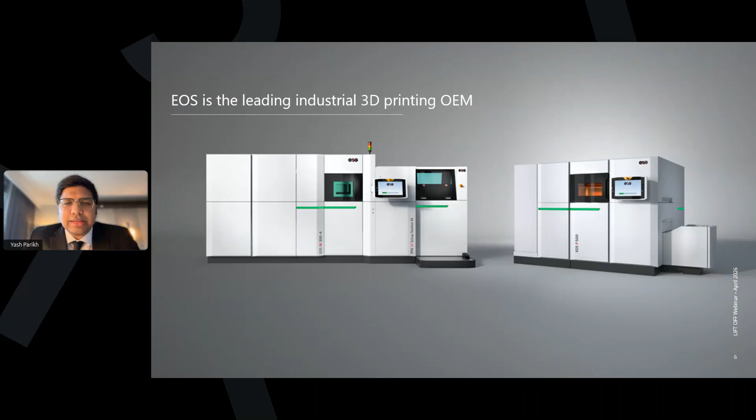From 4 employees in 1989 to 1,500 employees strong, we have presence in Asia, in Australia, in Europe, and over 5,000 systems have been sold globally, out of which around 2,500 reside in North America. So every other research paper talks about research conducted on EOS systems, and it's a moment of pride for us, and at the same time we take a lot of responsibility to be upfront on the research side of things as well. So from the revenue that we generate, 10% goes back to R&D.

And just last point here is global business is split 55-45 between metals and polymer. And if you ask me about North America, it's more like 70-30, with 70% on metals. Go to the next slide, please.

So that's enough of EOS. Let's talk about qualification. If you go to the next slide, I was pondering upon this question. I'm right now actually in DC, and I'm part of the AM coalition, and we are meeting all the senators. And I was just pondering upon this question: what are the key issues that are preventing a wider adoption of additive in general?

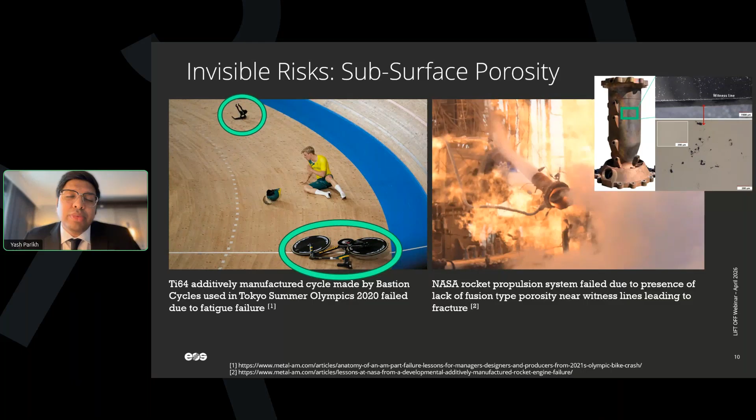And on the right hand side, you see a thermal mismatch that was studied by NASA. They looked at the interface temperature difference, interlayer temperature difference, and they paused the build for a couple of minutes. They wanted to see what happens if you resume the build. And I believe I have a video for this. It should be able to play. Go to the next one and I'll talk more about it. Take a look at this video.

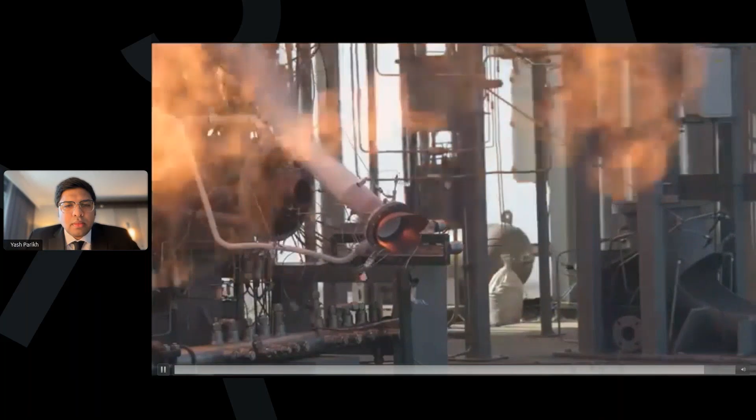All right, so that happened. I don't know if the audience was able to hear the sound of it. If not, that's what you got. Next slide, please.

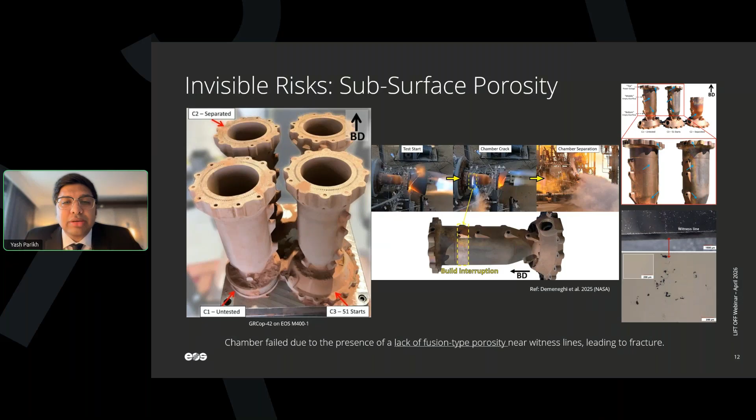This was printed on our EOS M400-1. Four cylinders were printed in the configuration you see on the left-hand side of the screen, in GRCop-42. As I was telling you, they wanted to see the thermal mismatch. In the laser powder bed fusion process, the solidification rate is 10^4 to 10^6 kelvin per second. They stopped the process in between and then restarted it. What came out is the build interruption and the witness line formation on the extreme right. Right below, you see a witness line which has lack of fusion porosity. That was the key reason for the failed part during testing, and you can see on the middle screen how it progressed. So go to the next one, please.

If you're using multi lasers, then one laser's soot is in the way of the others, and so many other things going on. So there is a joke in the community: your chances of a defect free part are less than your chances of winning a royal flush. So yeah, that's a reality. If you go to the next slide, please.

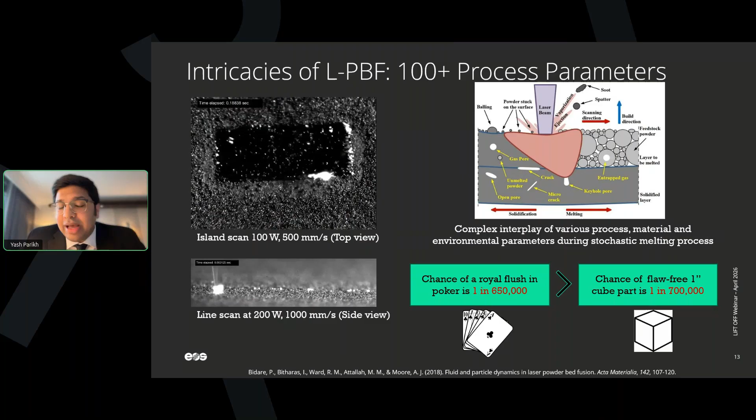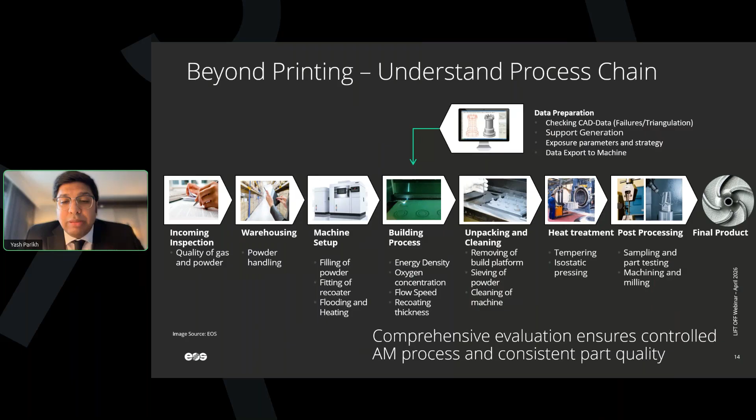Most of the time, the post-processing steps are the most important factor to the final performance of the part, because they are derived from the welding and casting literature, and they do not do justice to the laser powder bed fusion made part. So there is that. The fatigue behavior changes significantly if you have a different surface finish done on those parts off of the build plate. Go to the next one, please.

it gets confusing. What you're looking at is once the machine is made, and let's take an example of EOS, machine assembled in Germany, they run a test called factory acceptance test. It gets all the line checks done on it, and it's like thumbs up, it's good, it has passed its initial verification. It gets shipped to a customer in the United States. They run the same job which they have done at FAT, factory acceptance, and now it's called site acceptance. And then they compare, contrast the results, and now it is called installation qualification ready.

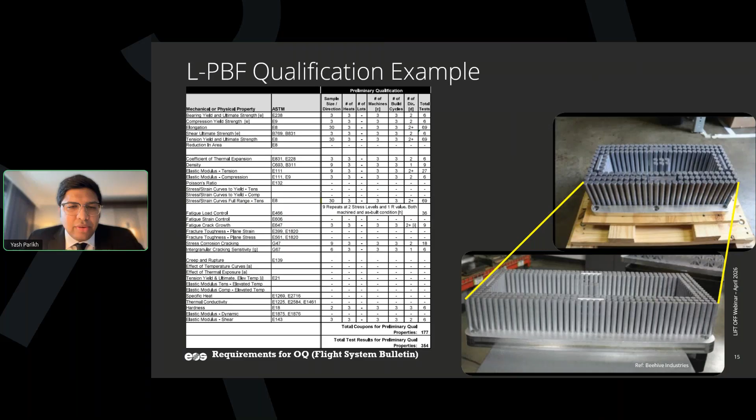If you go to the next slide, it tells you some of the numbers that are available in the literature. This image and the numbers are taken from the reference below. It's a paper published, and it tells you that the coupon count you saw on the previous slide is anywhere around that ballpark. Of course, it varies machine to machine, envelope to envelope, criticality of the part, material utilization. What are you trying to qualify?

Because it's a complicated term. The door hinge's qualification requirement, and subsequent issues when it fails, are different than something around nuclear. So these numbers, you have to just take it in a way that, okay, this exists in a variety of applications, and they don't carry over from application to application. But this is just to give you a ballpark.

And those in the audience listening to this need to know what qualification means in simple words. So when I talk about qualification, it means demonstrating the process is reliable and repeatable no matter how many times you print that part, where you print that part, who prints it. That is about qualification. And certification is about gathering all the data that you just did for qualification and giving this to a certifying body to make sure that they authorize your application to make that part. Could be an implant, could be a sporting good, anything like that. So that is all about qualification.

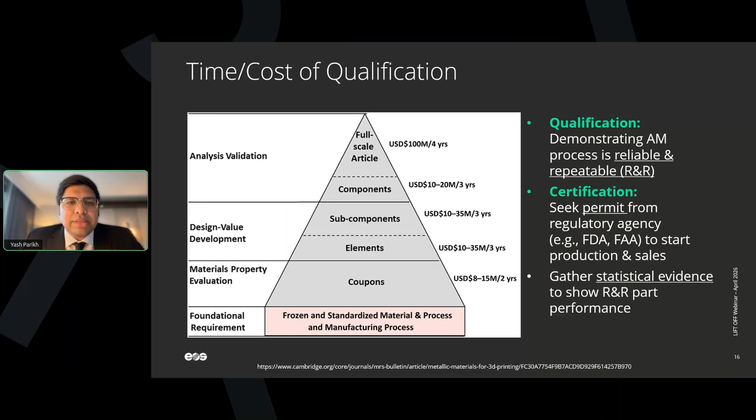So go to the next slide, and as promised, this is my last slide on qualification. The topic that I'm touching upon is AI, in-situ process monitoring, and closed loop control, which is the next generation of the approach for expediting the qualification burden. You see on the left-hand side, there are two different approaches. We talked about the disadvantage of doing this test coupon type of thing, and it's just costly, time consuming, doesn't really reveal the true nature of qualification, but you do it because that's what people have been doing. On the equivalence qualification side of things, A is equal to B, B is equal to C, and then you deem A is equal to C. But that's a lot of engineering judgment there.

What industry has been utilizing in the last, I would say, 5 to 10 years is reliance on ICME approaches, digital twins, a lot of emphasis on previous data. Take a look at EOS, for example. We have 35 years of machine-making experience, right? So we have all the factory acceptance test data on all our printers. Maybe that's a good starting point to take those data and understand where printers are, how their distribution of certain mechanical properties within the envelope exists. And then the newness is the in-situ inspection. People have tried those, but how do we do it for qualification?

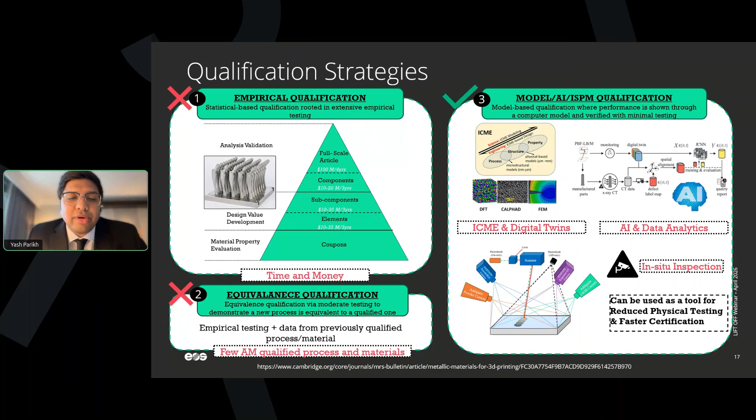So go to the next one. So next 40 minutes, there are about 60 slides on this. Let's see how many we can cover. Go to the next one.

Okay, so the concept lies on signature. If I ask you to draw your signature, like a physical signature, and ask somebody sitting next to you to do that, you can immediately say that that's not my signature because it doesn't have the uniqueness that only you can bring to your signature. So that concept has been executed in the next few slides.

The execution starts with running nominal jobs. The nominal jobs could be a configuration that you keep constant, because remember, qualification is all about making things fixed and then understanding the variation afterwards. So you define a nominal job, and I'll show you some examples of it, and then you run it a couple of times. How many times? I would say 3 to 5 times would be a good ideal starting point.

What you would see out of this is all the differences that you can get from running the same job so many times on the same machine, on the same layer thickness, on the same material. Of course, the differences are because you are now sieving the powder. You have a 67-degree scan rotation. You are utilizing different placements. All of that matters. And then you identify a signature that you think is an appropriate representative of this part or a build job.

So you put these modalities inside the laser powder bed fusion system. It could be 290, 400, 300s, and we tried it on our other OEM system as well. The concept is straightforward. You pick these modalities based on their defect detection wavelength. The radiation type differs, their wavelength differs, and hence the defect detection capabilities differ. I'll show you in a second how the same layout has been pictured via different modalities, and I'll go a little deeper into how each of these is helping us. The next one, please.

So EOS currently offers 4 different modalities. 3 are listed here. The other one is closed loop control. EOSTATE PowderBed is a powder bed camera of 2 megapixels. It's an off-axis mounted camera, and it takes a simple picture of the powder bed after exposing and after the recoating is done. It gives you the information if the recoating is being done properly, if there is part warpage, if there is recoater striking, if there are streaks on the powder bed; all of that you can detect with the optical camera.

On the melt pool side, you have an on-axis mounted photodiode, which is probing at the melt pool level and looking at the melt pool stability from all the photons that get emitted and captured on the photodiode.

On the exposure OT side, you have an off-axis mounted 12 megapixel sCMOS camera constantly capturing all the information from the build envelope, and it gets you the layer-wise process stability. So you're probing now from the solidification standpoint, from the standpoint of the melt pool. And of course, for the purpose of qualification, you need all of this information, which can be spit out as part of quality reports. Go to the next one.

Here's the fun. Yeah, you keep pressing next. You see, this is the laser. This is the on-axis EOSTATE MeltPool. The green one is the exposure OT on the off-axis side. And again, the off-axis powder bed is listed here. The off-axis ones are calibrated, and also you run a correction job so that their position bias is no longer an impact to the results that you are using.

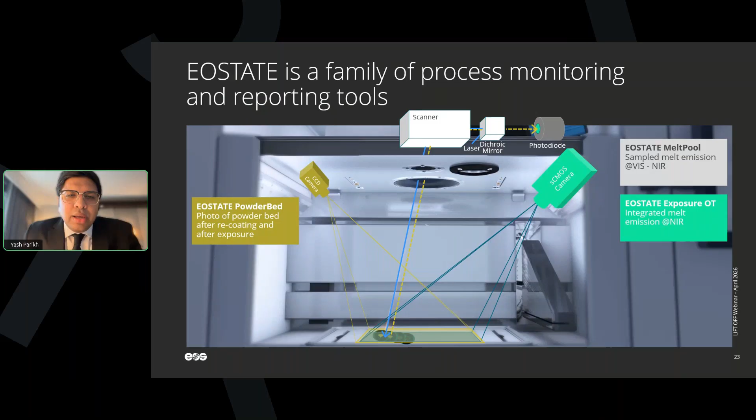What it does is the researchers have done this kind of work 10 years ago, and they gave us like, okay, my powder bed gives me these sort of streaks, swelling, short feed information, incomplete melting that you see on the first half of the image. The bottom half tells you the thermal imaging, which would be telling you the interlayer temperature right after the recoating is completed. All the exposing is done and recoating is done.

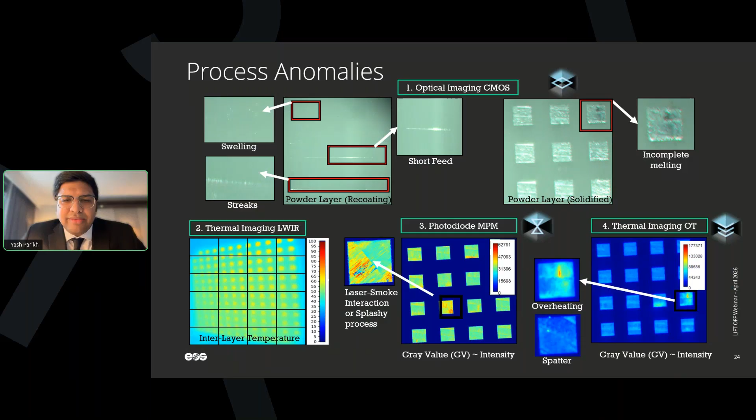Now you take the temperature of the build, and then you do the photodiode for melt pool monitoring and thermal imaging for OT for its stability. If you go to the next one, you will see here that I'm going to repeatedly use terminology such as gray value, and I would say mean gray value. So I want to take a moment to explain to the audience what I mean by gray value.

So understand, when the laser hits the powder bed, which you see on the top side from the scanner, a lot of photons get emitted. Of course, these photons get captured by an sCMOS camera that you saw. Depending on the 8-bit or 16-bit camera signal, the photons that are transmitted to electrical signal get to a certain value of the bar. If there is a 0 value, it means there are no photons emitted and there's no light. If it's absolutely dark, it's no light, it's 0 value. If it's maximum value, it means the maximum emission is happening.

And you can consider it loosely to say that there's a cold part, there's a hot part in one way or the other. So you see an example for a 16-bit gray value. The scale bar is 0 to 65,500 something. And when you are exposing it, it gives you the gray value from that scale. Okay. If it's a mean, it means the mean of all the pixels of that OT mask divided by number of pixels. And that's the mean of a layer. You can have a mean of a part, so on and so forth. And these parts are like 2000 layers or 50 layers or 700 layers, depending on how tall these parts are. Okay. Go to the next one, please.

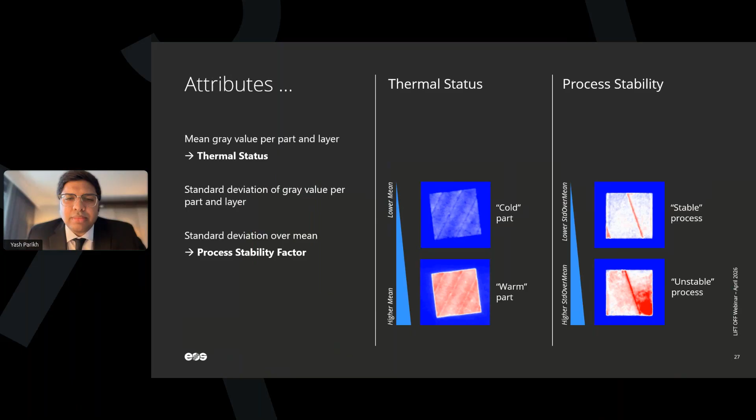And before we jump into the actual execution, this is exactly the same story. If it's a lot of photon emission, it's a warm part. If it's not a lot happening, it's a cold process. Similarly, a stable or unstable process can be identified by the gray value variation and the higher standard deviation. Okay, go to the next one. The one thing I want to bring to your notice is this. The OT works with a masking technology, meaning it does mask on your CAD, on your scan area.

And we have come across a few instances later on, but just be mindful that in order to have a good OT, you need to run a calibration job, and you also need to understand if the masking has been done correctly. And this is a software correction. So you just have to run one of the calibration builds, and you should be able to do this correctly. Okay, go to the next one.

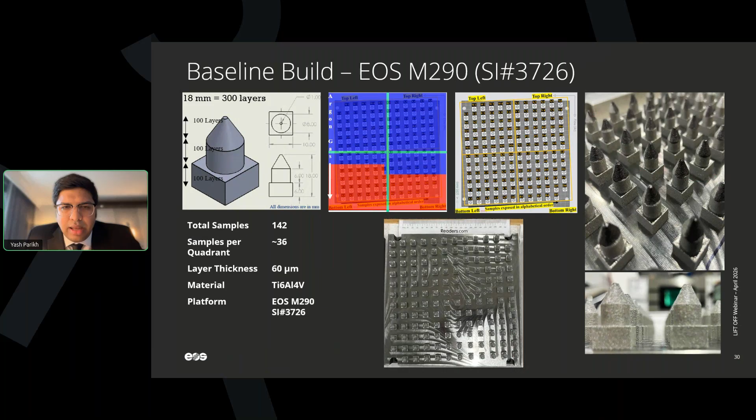So we chose this, we made an 8-hour job, we made it 300 layers, 100 layers each for each cross section, and we did 60 micron. So you can understand that is how it is. It is 18 or so. Every 6 millimeter, the cross section changes, right? We laid out 142 of these on our 290, and you can see up close the scanning happened in the unidirectional direction that you see on the red path of the laser. And go to the next one.

This is where the next 30-odd slides of fun begin. OT is telling me this: my intensity across the 142 samples somehow is not even, meaning some of the pockets on my build plate are emitting more photons than the others, though I have a scanning which starts at lower left and ends at top right. On the left hand side you see the 3 segregations of 100 layers each for each sample combined. You see there is a pattern where the bottom right region seems to continuously have a higher mean gray value than the other areas.

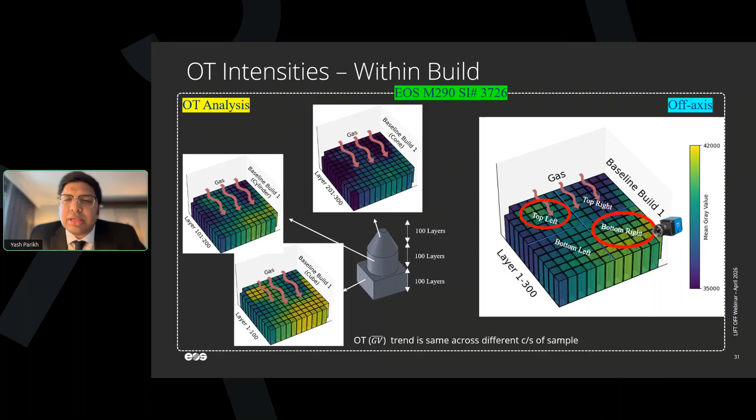Especially take a look at the top left region as well, which emits a very high gray value compared to the top right. Of course, this is an M290 machine. There is a gas flow which comes from back to front, and recoating is happening right to left, right? So when you combine all 300 layers, this is what I see. And I thought this is an anomaly, or this is just because I ran this baseline build one time. Go to the next one.

I did this 3 times. The results remain the same. You see baseline build 1, baseline build 2, baseline build 3. All 300 layers show a similar behavior. This tells me that no matter how many times I'm going to run a job, my specimens on the bottom right are always going to be hotter, or always emitting more OT value than the others. So why, is the question then? It's an off-axis mounted camera. So the bottom right illumination was because of the bias of the camera placement.

When you open the 290 door and look at the build chamber, you'll see the position of this is at the top right corner. There is that, and then there is a gas flow which is hindering on the top left side of it. And you can see the CFD analysis. NIST has carried out a very detailed study of a similar observation, and that has to do with the grid nozzle that has been utilized, which has some pocket over there. So, go to the next one.

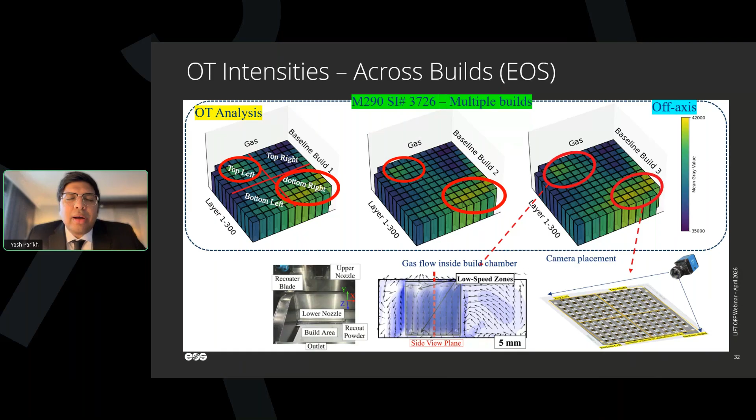Out of 142 samples, we labeled them from A1 all the way to X6. And here are the samples U3, U4, S3, S4 on the top left, and all the D1s, F1s and H1s on the right-hand side, which showed a high gray value. So we need to really understand carefully whether red means bad and green means good, or red is just okay and you have to accept the position of it. So I have to really probe into U3, U4, S3, S4, as well as some of the J6s and L6s across the build job. But I need to be certain that whatever reasoning I have derived is justified. So I went into a different modality. Go to the next slide.

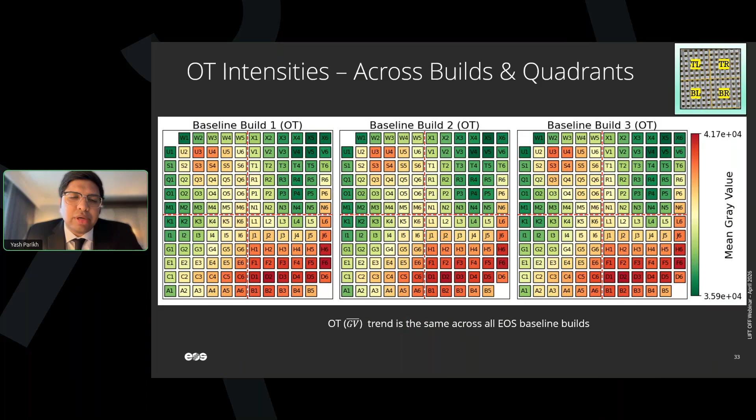This modality is an on-axis mounted melt pool monitoring. Take a look at bottom right now. That bias is gone. There is no high gray value on the bottom right region at all. That tells me that that was because of the placement, and top left still exists.

Means something is going on in the top left, which has been detected by both off-axis modality and on-axis modality as well. So top left is still showing me high gray value. So that is something that you need to be accounting for. And that's how switching to a different modality like an on-axis MPM helps you here. Okay, go to the next one.

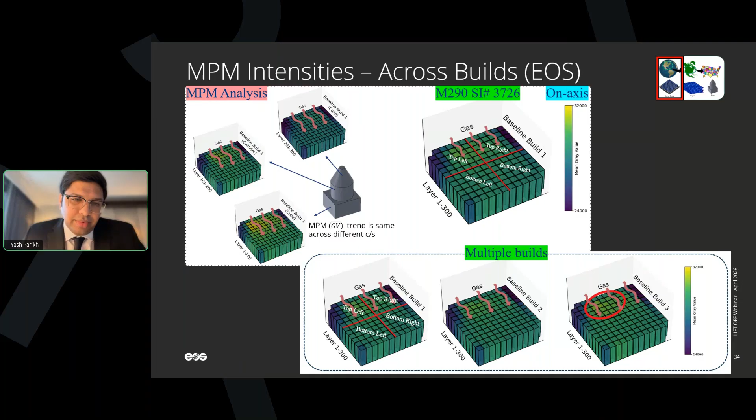Now let's take a look at how the signature of these looks like. Before that, this is an important slide, because I told you I tried this out on 290s, 400s, and 404 as well. We used two different locations to try this concept. So one M290 at EOS and the other at the collaborator space at the Ohio State University. Take a look at two signatures of 290, which are kept next to each other.

The phenomena that I identified on our M290 in Pflugerville had those spatter process instability, and it is that you see in that yellow box. On the right hand side, however, the Ohio State machine, that was not there. However, they found something very unique on the bottom left side of the machine, where they were having more process instability in there, which tells you that there's something going on machine specific.

That's how all the qualification are tied to certain machine characteristics, right? And then you cannot blindly place parts and skip their testing and all of that. And that's a part of this, that it varies machine to machine.

So upon further investigating what is happening at the Ohio State, that they are getting that sort of process instability on the bottom left, we found out interestingly that their powder collecting bin, when you recoat, the leftover powder gets deposited in the collector bin, and collector bin needs to be some certain, don't quote me on that, but it's something 50 should be below it. And if it's more than that, it kind of puffs the powder and puts it back on the corner. So we noticed that, and that is part of the reason.

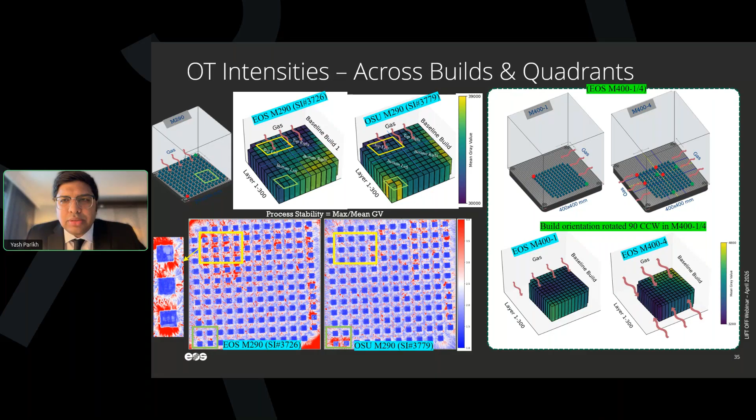So here you start seeing the signature. Now you ran nominal jobs. Go to the next one. You start seeing the signatures of, this is what it looks like. The background is this. No, go to the previous one. Yeah, this is the OT image. It tells you that the back watermark image is the actual sample, just horizontal way. And you see that build 1, 2, and 3 showed me some of the signatures of this part. And these are for all 142 samples combined.

They look like this. At 100 layer, there is a double exposure happening. So sometime it kind of gets you on a high level. And then as you're emitting less photons, because of change in cross section, the signature is kind of dipping down, right? And noticeably, this is the whole point of selecting this geometry, to see how the sensing is in sync with the geometry.

Upon closely looking at layer number 10 to 50, we said why it is not exactly the same. And that's how you run the nominal job. You want to look at why they are not overlapping absolutely on top of each other. And part of the reason you'll see in the next few slides, I'm going to talk about it, and it has to do with the scan rotation and all of that. So go to the next one.

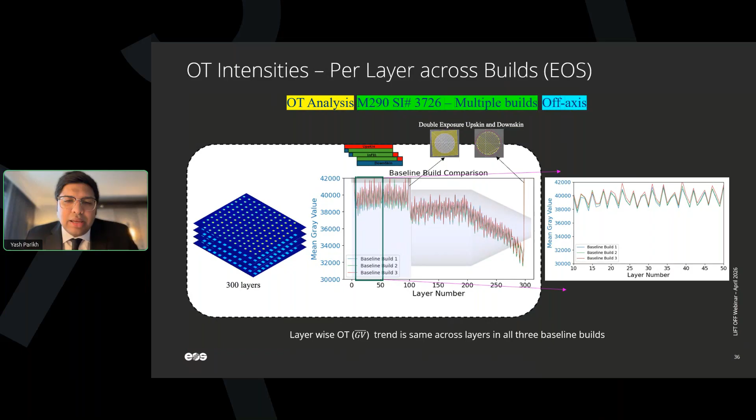And here's the signature for 142 samples for the melt pool monitoring. Of course, the mean gray value is drastically different because this is a photodiode. OT is the sCMOS camera. This is a photodiode.

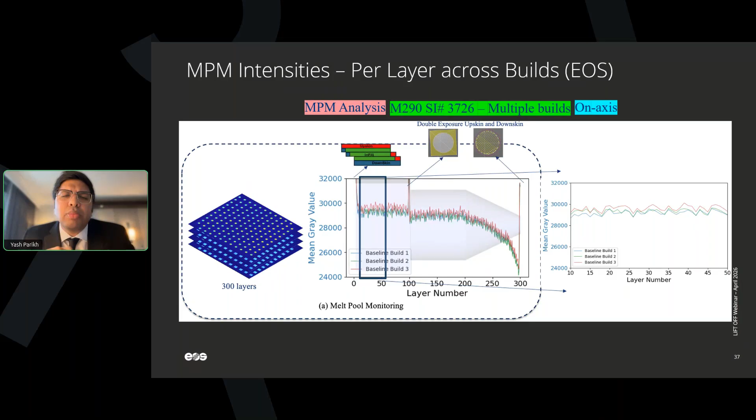So of course, but overall trend seems to be similar. Of course, you see the spike at 100 layer because of the change in cross section. But again, the 10 to 50 layers were investigated, and you see the red, blue, and green line not superimposing on top of each other. That's the whole point of running the nominal jobs. Go to the next one, please.

So we need to now probe, and I need to wrap this one up quickly. I need to give you enough time as well. I'm 37 minutes in.

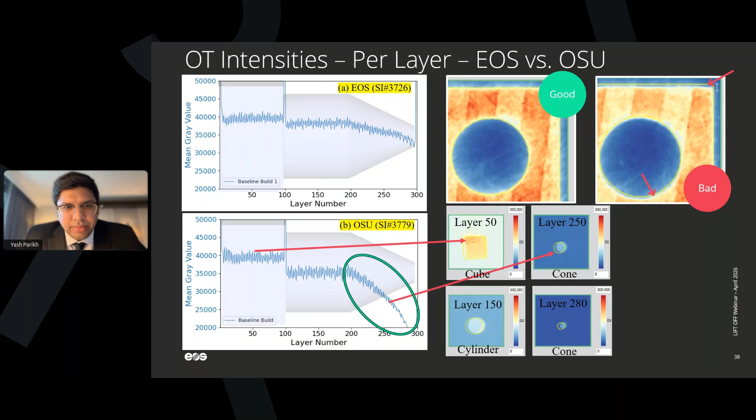As I told you, I have like 30 more slides, so we need to hurry up as well.

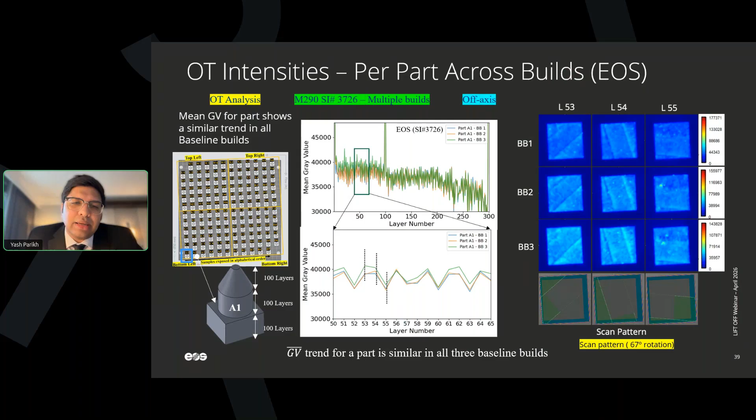Same application of concept, but different modality. You see the same results. That variation belongs to the scan pattern. Okay, and also, of course, the position of it. If A1 trends this way, if I go all the way to U3, U4, around that, it changes slightly, but it is still having those differences as well. So go to the next one, please.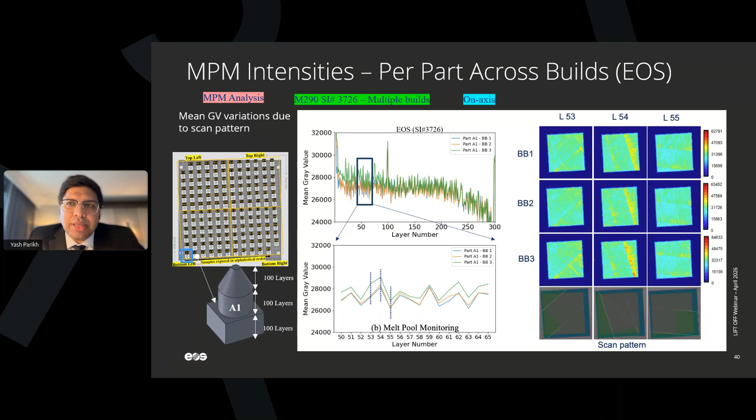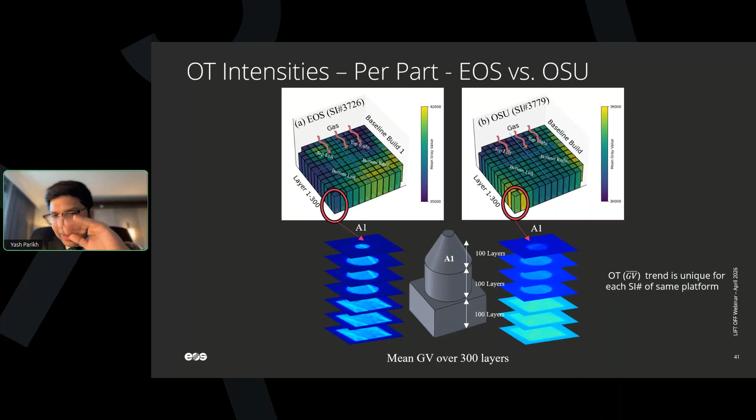So here's the example of that A1 location, and you see the first 100 layers had a higher OT value for the OSU case than the middle 100 and the last 100, because now you keep filling out the overfill bin, right? The collection bin. So there's not a lot happening there as well. So it subsides a little bit, but this is just to tell you how it slices up and gets you the information at different layers, right? Go to the next one.

That tells me this is very important, because now I'm locating J6 and L6 spots on the right hand side, and just wanted to see how J6 and L6 for baseline build 3 look, and why they're not exactly the same. What does the initial spike mean on the high gray value side? My logic tells me that if it's a high gray value, it's a hot spot. Because of the small particle size, it might fly here and there, as you saw in that video. It's a finicky process. There's a lot going on. So it's very hard to pinpoint these variations. But we tried getting a few.

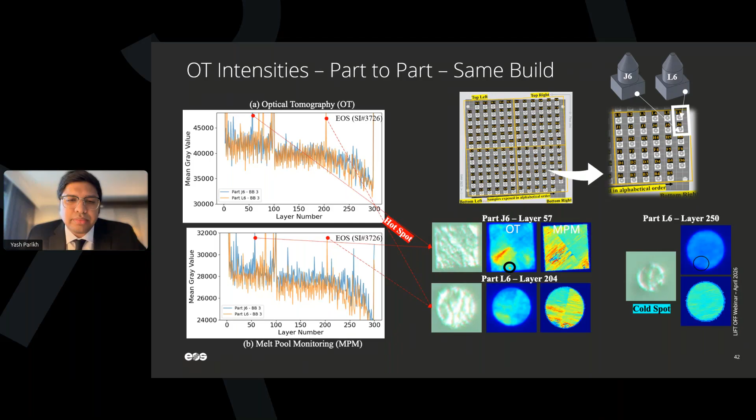So we looked at, say, layer number 57, 250, and 204, which showed me spikes. At 200 and 100, the spikes are believable. But at 204, I wanted to really see what's going on. So we looked at OT, looked at melt pool monitoring, looked at the other modality, and we found these things are because of the spatter and because of the small particles that are absolutely shooting up the mean gray value. Go to the next one. Here's the story.

That purple signature is the mean gray value based signature for all 142 samples run three different times, right? What I'm trying to say from this is that the mean value approach is not so much preferable. In laser powder bed fusion, there is remelting happening for at least 5 to 10 layers, depending, of course, upon your layer thickness and your laser power. But you see the orange line is a more believable signature. That is the moving average of the 5 previous layers' history of the OT mean gray value. And that is exactly in sync with my red line.

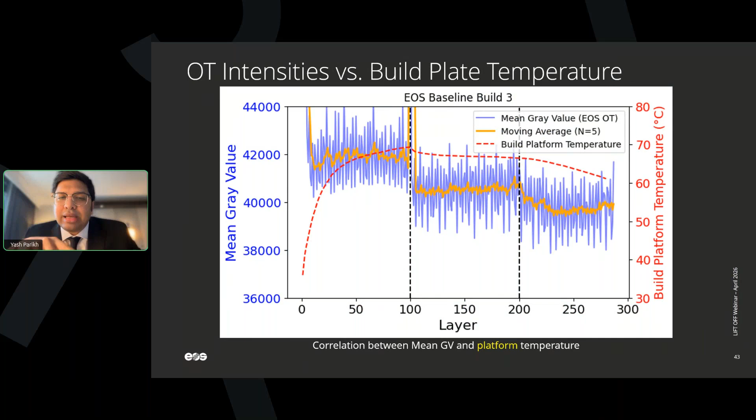What is my red line? It is the build platform temperature. When I start the build, on the right-hand axis you can see the build platform temperature. It starts at about 35 degrees Celsius preheat temperature. This material is Ti64, by the way. It nicely increases for the rectangular cross section, becomes steady for my cylindrical cross section, and nicely dips down again for my conical cross section. So this tells me from the fourth modality, the interlayer temperature and build platform temperature, that they are in sync, and these signatures do correlate with each other. Go to the next one.

Now you look at all the quadrant-wise signatures. You split 142 samples into quadrants. You look at top left, top right, bottom right. These are about 36 samples placed on top of each other, just to show you what's going on in the EOS system. The EOS M290 had a finicky top left, as I told you, the U3, U4s and all of that. Bottom left and bottom right seem pretty steady because they're away from the gas flow. That is one of the reasons you see bottom left and bottom right being steadier than top left and top right. Go to the next one.

We look at the similar signature, and just one quadrant is exposed here for all 36 parts. The 36 parts are below: B1, B2, B3, B4, B5, D1, D2, D3 onwards. We said let's look at J6 and L6, marked in yellow and green, to see what those random spikes are, because the third step is establishing those pink lines, the upper and lower limit. So you really want to understand all these things from that perspective. So go to the next one.

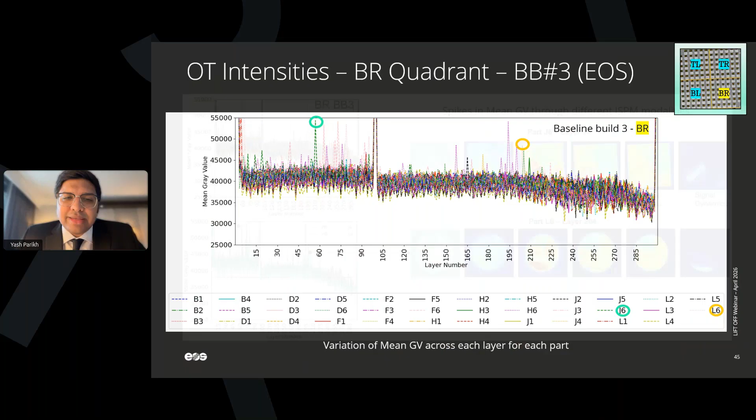What we found out is they correlate to defects. J6 and L6 were looked at closely for all modalities. For integral GV and max GV, I said, don't believe the mean gray value. Just give me an integral value. Give me a max value, moving average for 1 layer, moving average for 2 layers, moving average for 5 layers, signal dynamics. You really probe that and you see that's exactly what it is. It is not just an anomaly. It is at that point that the mean gray value is flickering, because of what we discussed. Go to the next one.

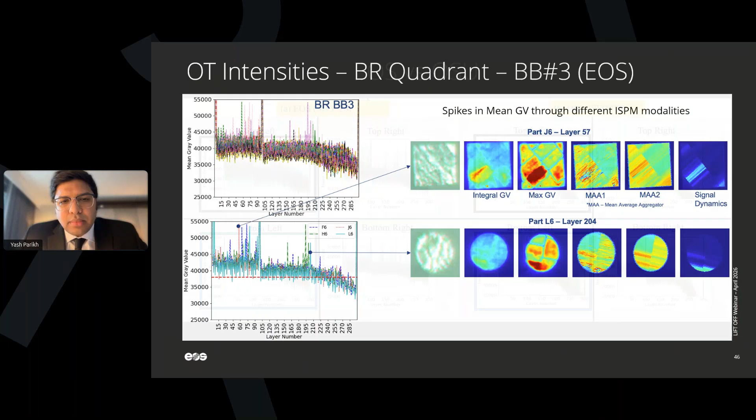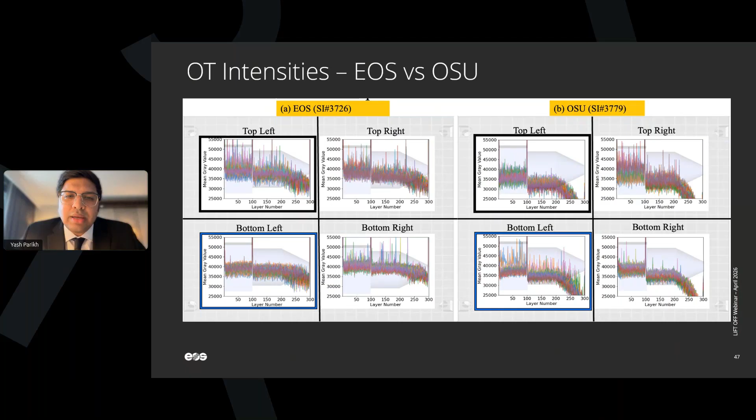Trust me, I'm going to end soon, but this is how you do it. You run those 142 samples and place all the quadrant-wide information. Now 142 samples are placed on top of each other. The green line is without any tolerance, what you would like to see. The upper threshold, the lower threshold, this is how you can adjust your goodness criteria, right? Next one, you'll see what we discovered from there. Go to the next one, please.

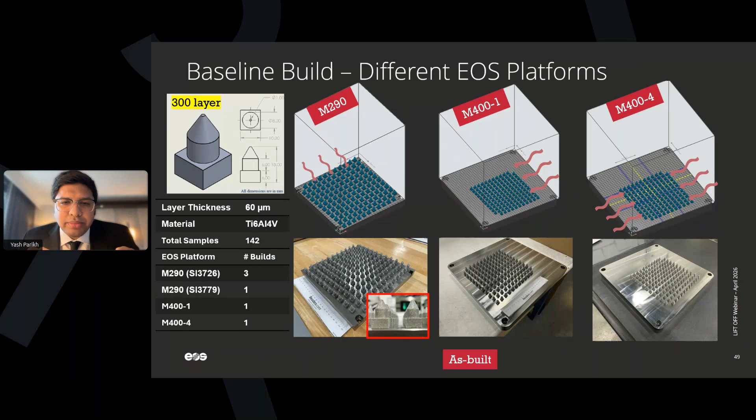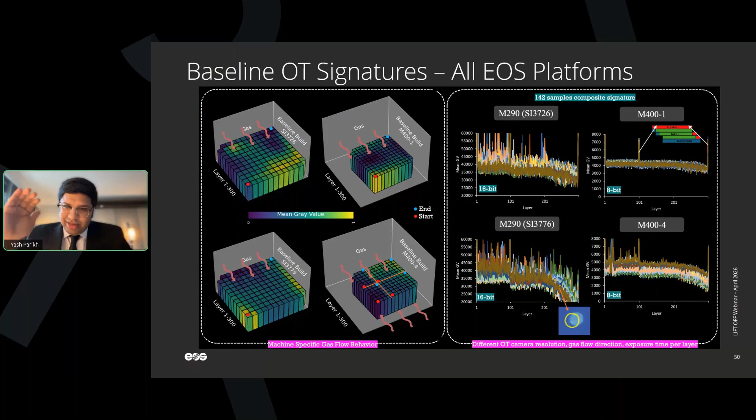Again, we did this for M400-1 and M400-4. Not going to talk about it. Go to the next one. That's the signature, 8-bit versus 16-bit. Remember, while talking about OT, I said 16-bit has 65,000-something values. You can see how steady 4.1 is for 142 samples. You see how 4.4 is more varied quadrant-wise, still 8-bit, but you can do the same thing. Yeah, go to the next one.

Here's that signature concept. You run nominal jobs and arrive at that black reference signature, the mean gray value based on the moving average. You then start applying a 10% or 15% margin on it, depending on what kind of part you are trying to qualify. What is the safe window that you are okay with? And you have to investigate every outside spike that you see from these different modalities, right? So we did that. Next one.

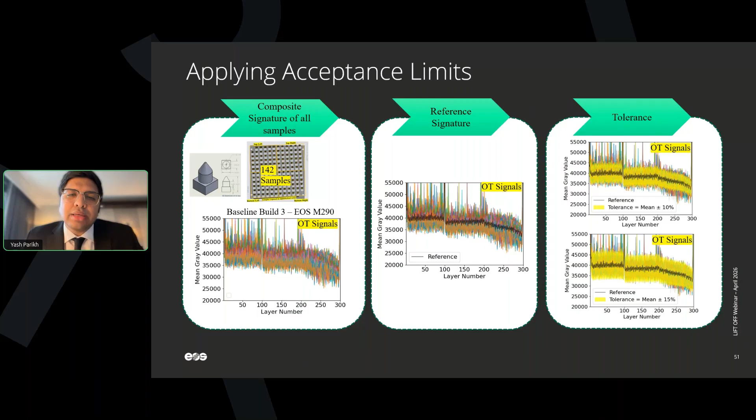All right, so that U2 part was split open. I said, without any post-processing, we just took it off from the build plate. I said, get me the number of pores that you see through the microscopy, and we were amazed that this is a signature on the top left side of the part U2 for all 300 layers, and it's a mean plus or minus sigma from its moving average signature.

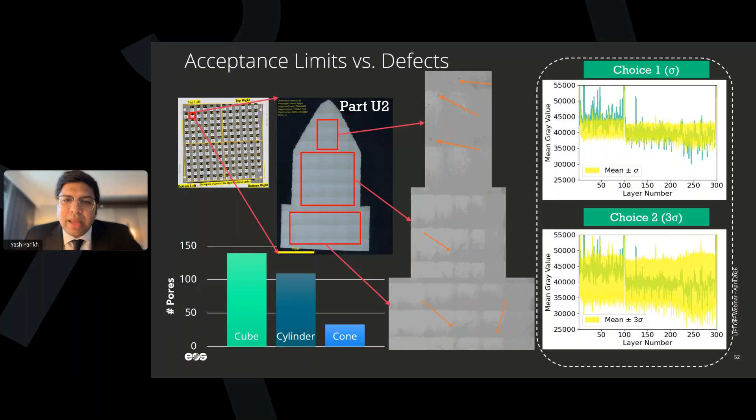My choice 2 is to apply 3 sigma on top of it and just see what exists on the outside, to see what all those spikes mean. If I'm qualifying this part across the bed with a 3 sigma cushion, how many parts would not qualify right off the bat? So before I do that, I said there exists a fourth modality with EOS, which is closed loop control. We wanted to try that out as well. So go to the next one.

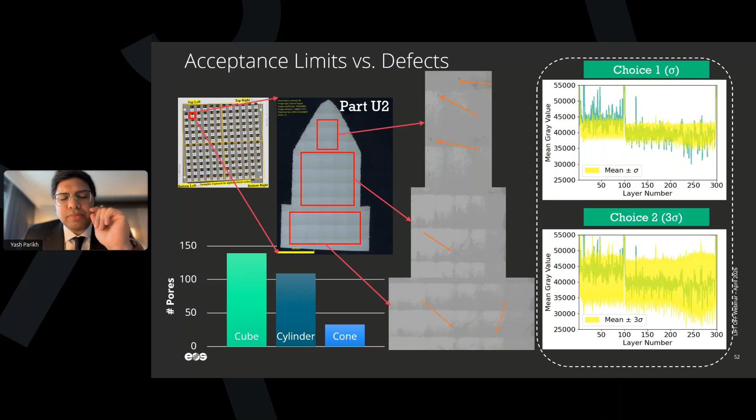How does closed loop control work? The regular builds that you saw had a process parameter pre-optimized. You feed it to the machine, it does its job. Smart Fusion works in a little different way. It's not a black box in any way. It's a PID controller which takes the previous layer's gray value and adjusts the laser power. It just reduces the laser power at this point.

It doesn't increase the laser power; it's based on the value that the user enters at the start of the job, like 3% variation from the nominal process parameter of 340 watts, for example. Then it would reduce laser power up to 3% of 340. And you don't put some arbitrary number so that you get a keyhole porous part. So it gets to that correction factor based on looking at the gray value variation, and it reduces the laser power. It does it on a particular part, not the entire layer. So you'll see that in a minute.

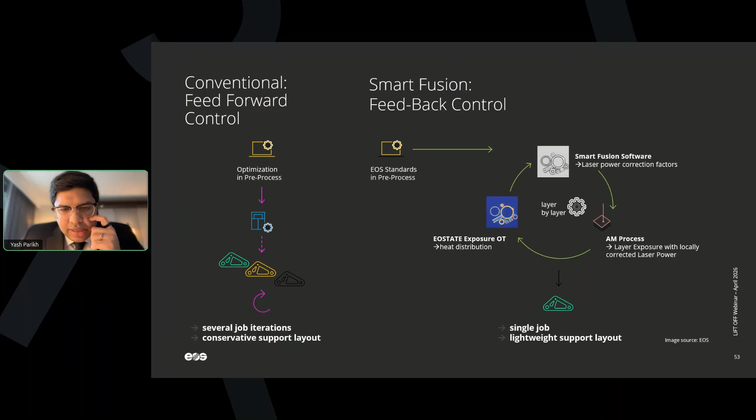The next video shows a different material, Inconel 718. Go to the next one. Play this video, please. You see the standard parameter. You'll see a recoating done right now, and you'll see a standard parameter getting exposed with that 340 or 240 watt. You see a lot of interaction of powder and laser. You see Smart Fusion, it auto-corrects the laser power. Really doesn't have any afterglow, right? Next one.

So what it does is it allows us to control the thermal balance of our parts. This is an example before I go to the real work that we did with this, but this just tells you that because of controlling thermal history, you don't need that much support structure. Support structures are more difficult than just the thermal history, but in essence it is basically connecting your heat sink, which is the build plate, to that part, so that you can avoid any part lift-off and things like that. But this is the core message that I'm trying to give you. So go to the next one.

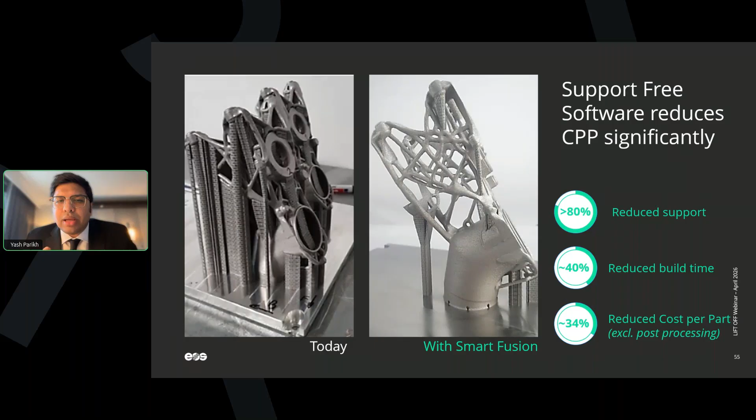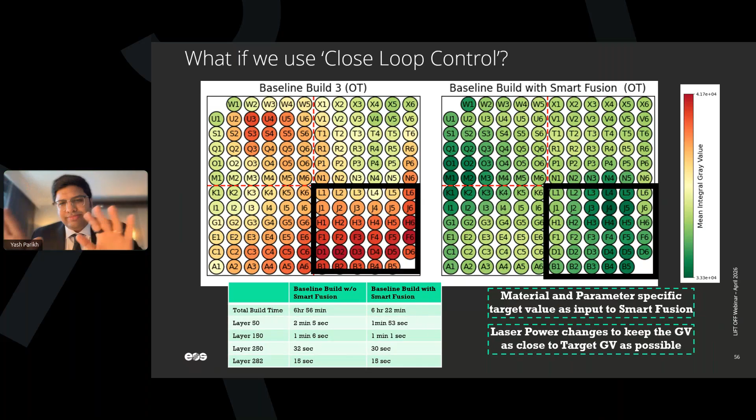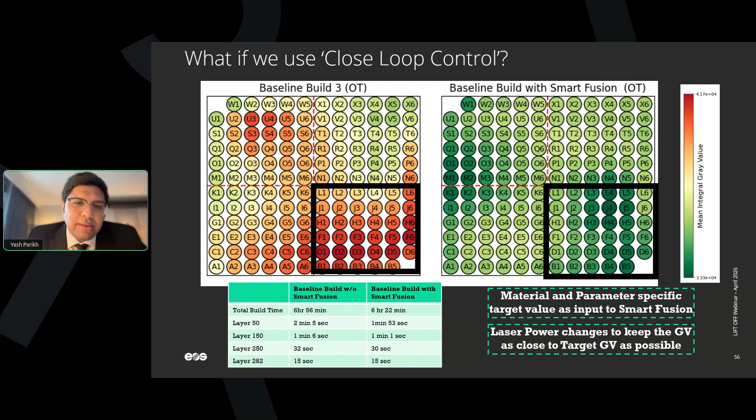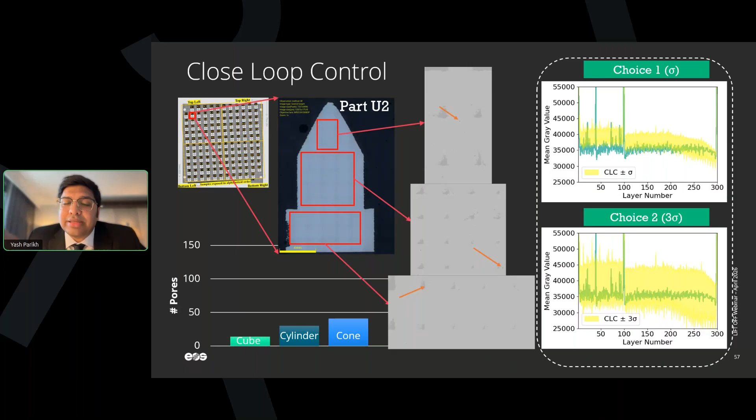So we did split open the same part, this time U2, and looked at what happens to the porosity and all of that. And you can see what we found: the signature is very constant, very stable, because the set gray value was like 41,000. Anything above that is not there, except layer 100, which I told you about, and it auto-corrects it. So everything is now very stable. At 1 sigma, and at 3 sigma choice 2, everything is almost qualifying in the case of closed loop control. So now go to the next one.

You see the comparison here for that U2 part between without closed loop and with closed loop. So now you see the amount of reduction in these as-built porosities. Go to the next one. These are not bad porosities; they are not connected or linear, so they can be easily filled with the HIPing process. Go to the next one.

So the big question comes as, how does the signature look? The part U2 on the left, you have a blue color signature when you don't use Smart Fusion. It is what it is, behaving as we saw across my explanation. The red one is where I set a value of 41,000 as my target gray value. Anything over that pushes back by reducing the laser power, still giving me a better part than the part that is being printed without closed loop control.

So you can see side by side the same comparison of cubical, cylindrical, and conical cross section for its number of pores, and the microstructure as well in the next slide. Go to the next one.

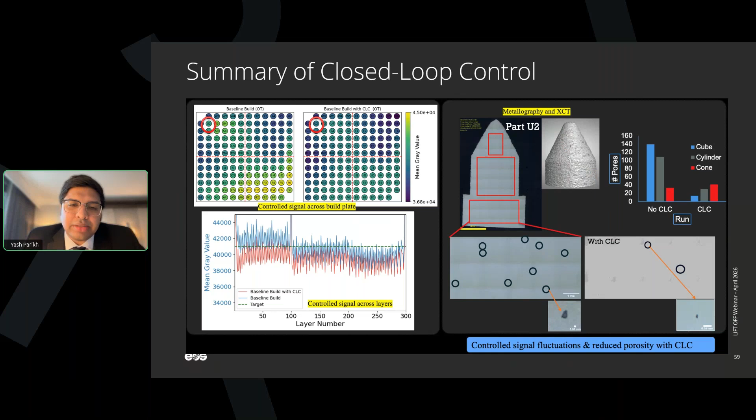Where I'm going with this is, if I can predict with my center portion of mean gray value the formation of the microstructure, that is where I'm trying to get my mechanical properties derived from. Because at least I'm printing my parts with some notion of having a certain type of microstructure that so many times would yield a certain mechanical performance. Of course, the signature would be correlated to the as-printed status. The moment you heat treat, stress relieve, HIP it, the signature has nothing to it unless everything is constant and assumed that everything was done in a single batch. Otherwise, you have control till this point.

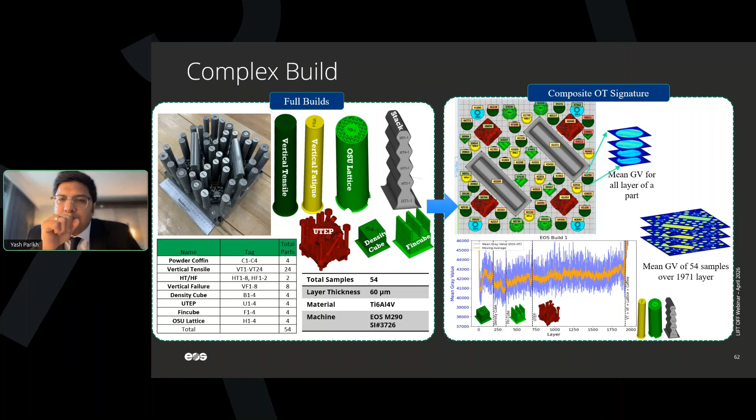How much data does it spit out? Go to the next one. How much data does it spit out? It spits out 500 gigs of data. Each modality, such as optical tomography, is 10 frames per second, 110 gigabytes for a 1971 layer build job, 36 hours long. Melt pool monitoring close to 80 gigs. Powder bed 20 gigs. How much is actually utilized for making these signatures and all? A few GBs. It's the Excel that matters at the end of the day, right? But we gotta be collecting this for your qualification. Go to the next one.

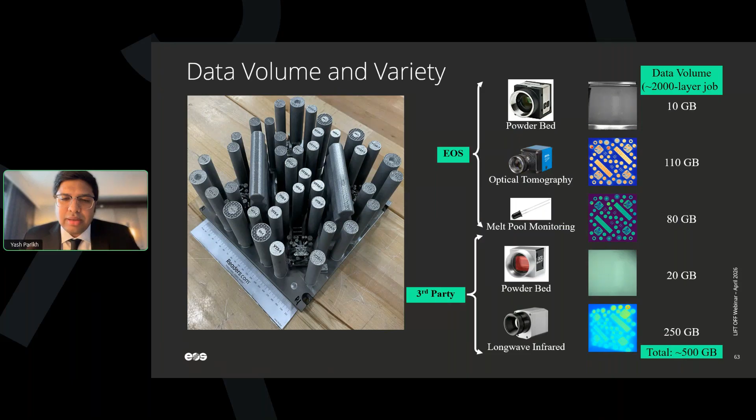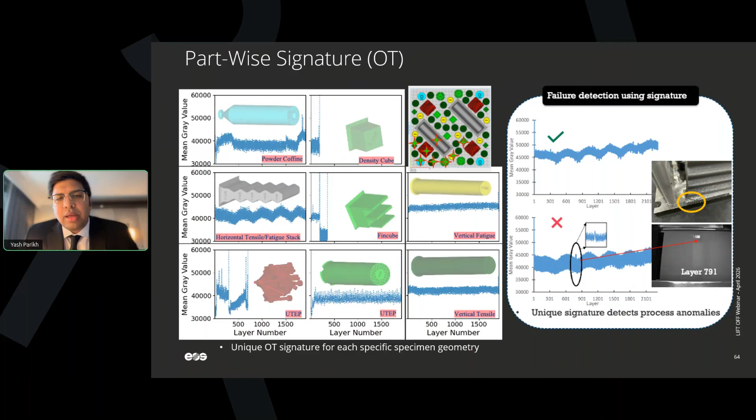I zoomed in, I looked at it, I looked at the melt pool monitoring, I looked at OT, I looked at optical, and optical shows me the part got cracked, the part got warped during the build. So this is what it is. It is telling you that you can actually get the most out of it with this multimodal approach. So where is the AI part coming in this talk? Go to the next one. I think you can skip a few slides. Go to the next one.

This is like build one, build two, location specific, the gas flow and all of that.

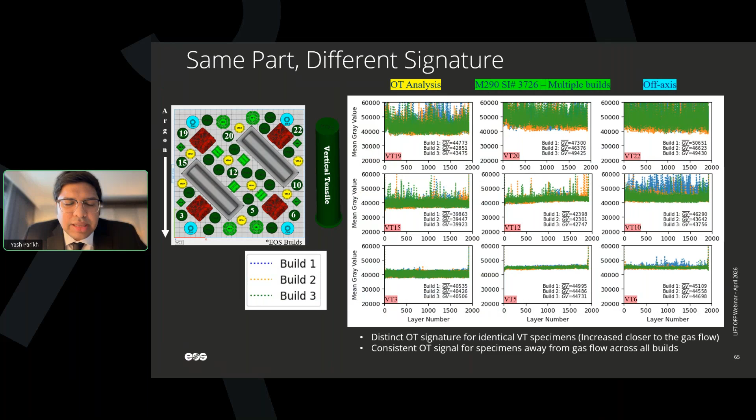Can you get out of your full screen mode and allow me to pick my last slide to tell them about AI, and then we can take question answers in the next 3 minutes. Just the last slide. Is it possible to... no, it's way far, at the end. Keep going. These are all the mechanical test results. Keep going, keep going. Yeah, one before, and one before as well.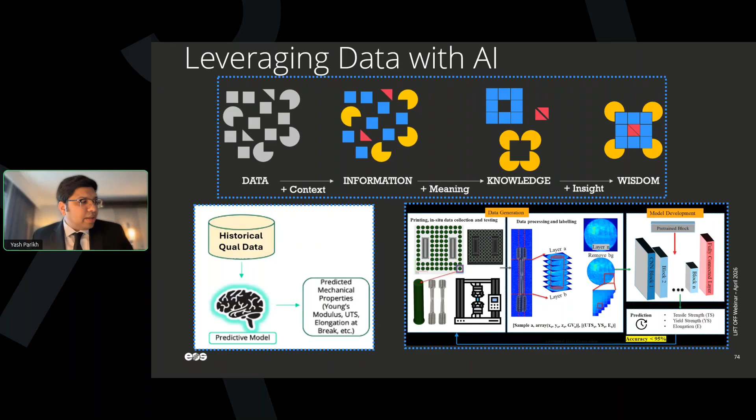That's okay. Thanks, Yash. It was a great presentation. Obviously, you've articulated why it's important to deploy AI, how to achieve faster, scalable qualification, and accelerate component qualification, which is very important, we know, to this industry.